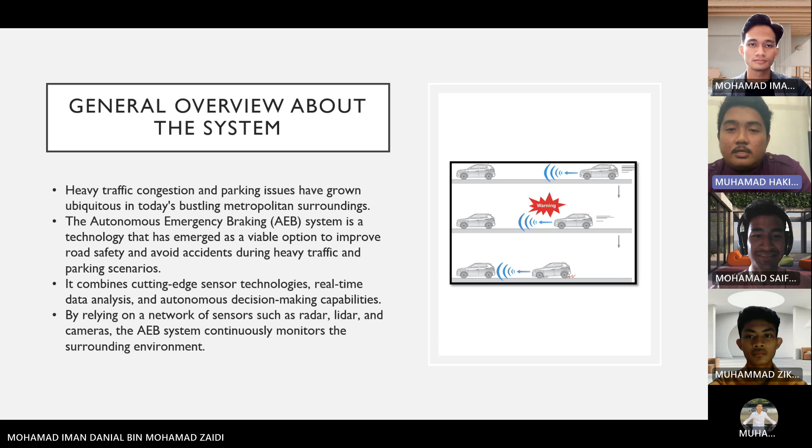The next topic is the objective. The objective of this report is to assess the performance, functionality, and limitations of the AEB system, while also considering its impact on reducing accidents and improving overall traffic flow in congested environments.

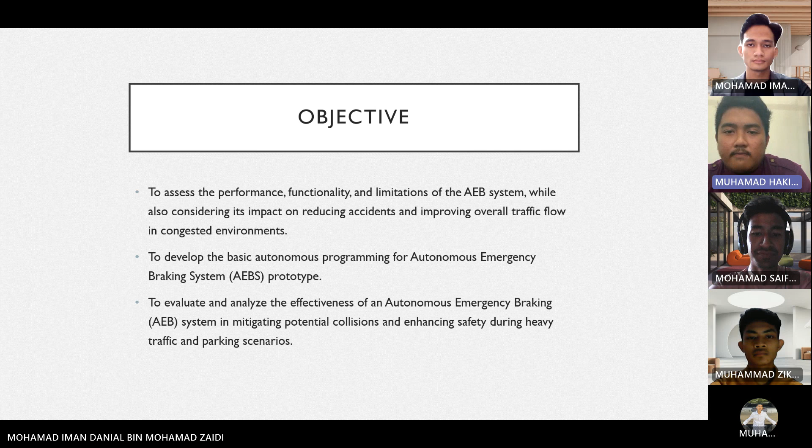To develop the basic autonomous programming for an autonomous emergency braking system prototype, to evaluate and analyze the effectiveness of the system in mitigating potential collisions and enhancing safety during heavy traffic and parking scenarios.

Next is the justification for why the system needs to be integrated with IoT. First is real-time data exchange: IoT connectivity allows the AEB system to communicate and exchange data with other vehicles, infrastructure, and smart devices in real time.

Second is advanced sensor fusion. IoT integration enables the AEB system to combine data from various sensors, both on board the vehicle and from external sources, such as traffic cameras or weather monitoring stations.

Enhanced early warning system: by leveraging IoT connectivity, the AEB system can receive early warnings and alerts from infrastructure and other vehicles.

Vehicle-to-vehicle communication: IoT integration allows vehicles equipped with AEB systems to communicate with each other. Lastly, cloud-based analysis and learning: IoT connectivity enables the AEB system to transmit data to cloud platforms for analysis and learning.

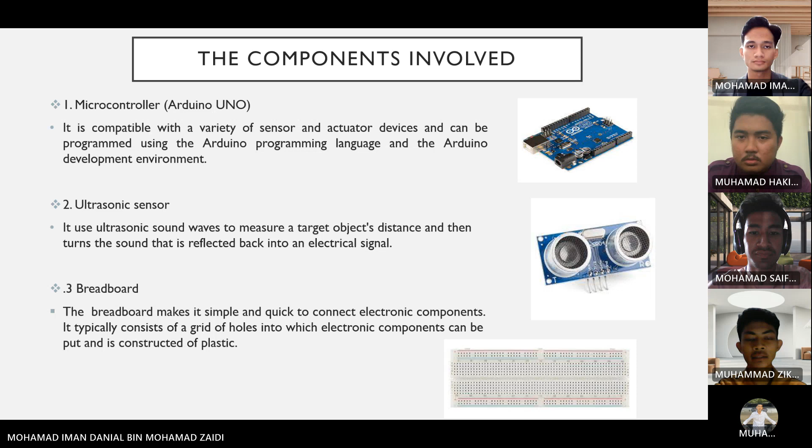Number four is the motor driver L298N. This module is capable of driving DC motors with peak currents of up to 2 amperes and a voltage range of 5 to 35 volts. It is a twin full bridge driver with high voltage and current that can drive inductive loads, including relays, solenoids, DC motors, and stepping motors.

Lastly, the buzzer. A buzzer is an electrical device that makes a buzzing sound when activated. They are commonly used as a signaling device, and some buzzers are also used as speakers for electronic devices such as smartphones or computers.

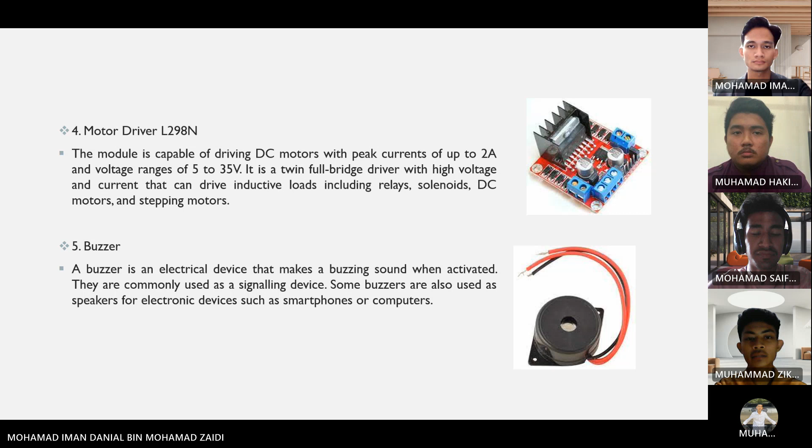Now we move to the software involved. Number one is Proteus, used to simulate electronic circuits and microcontroller systems. Before developing electrical circuit designs, it is used to design, test, and verify them.

The software offers a graphical user interface for creating and modeling circuits, in addition to a large selection of simulation models for various electrical components such as microcontrollers, sensors, and actuators.

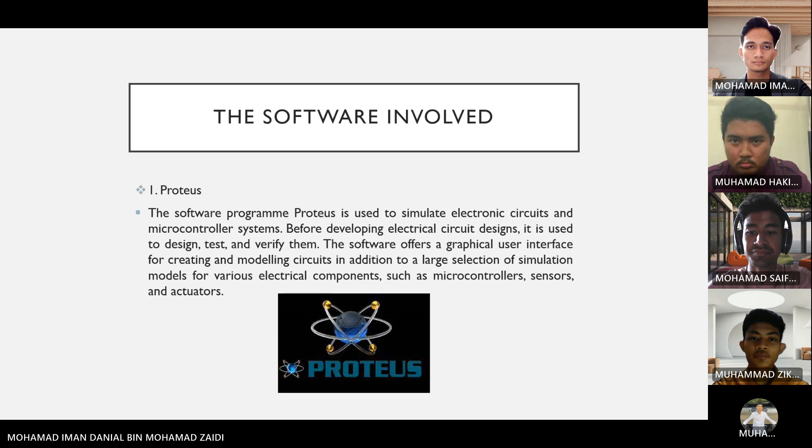Next, number two is Arduino IDE, a software application that allows users to write, upload, and run code on the Arduino board. It is a simple, easy-to-use program for writing, uploading, and debugging code, including a code editor, a library manager, a serial monitor, and a built-in programmer.

The code editor is used to write code in the Arduino programming language, based on C and C++. The library manager allows us to easily add and manage libraries of pre-written code that can be used to interact with different sensors, actuators, and other devices.

The serial monitor allows us to see the output of our code and send data to the Arduino.

Last for the software involved is MIT App Inventor, an intuitive visual programming environment that allows everyone to build fully functional apps for Android phones, iPhones, and Android or iOS tablets. Those new to MIT App Inventor can have a simple first app up and running in less than 30 minutes.

What is more, the blocks-based tool facilitates the creation of complex, high-impact apps in significantly less time than traditional programming environments. The MIT App Inventor project seeks to democratize software development by empowering all people, especially young people, to move from technology consumption to technology creation.

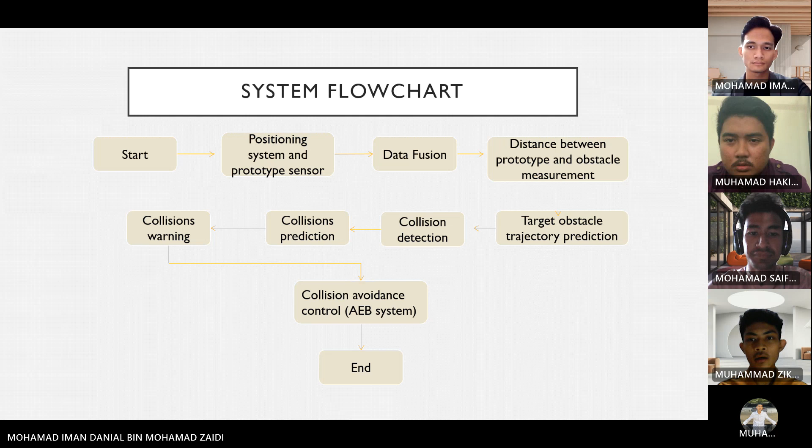So this is the process and activities offered by the proposed system. Collisions must occur, causing severe harm, serious injury, and even death. Accidents also usually happen while driving in the city because the car panics excessively to the point of experiencing emergency braking, so that sometimes we don't even realize it happening. To make life safer, we want to address the issue of repeated accidents by having an AEBS. Therefore, this project is important to ensure that the AEBS can function properly and achieve the desired purpose.

Alright, for the first activities offered, which is assist the owner. The autonomous emergency braking system (AEBS) works when an infrared sensor detects an obstacle in front of the vehicle. The infrared sensor will provide the information to the microcontroller. When this occurs, the data will be interpreted by the microcontroller, which will then determine the distance between the car and the barrier. The microcontroller will command the motor driver L298N

to operate. Next is automatically function, for the purpose of pulling the brake pedal attached to the brake system. When this happens, the brake caliper grips the brake disc and brings the vehicle to a complete stop. When the vehicle comes to a complete stop, this will come to an end. If the vehicle identifies an obstacle in front of it, this circumstance will reoccur.

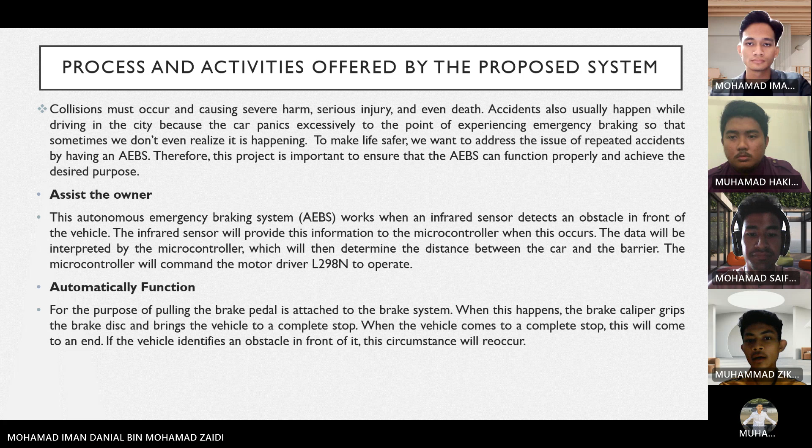So I will continue with the user interface design of the autonomous emergency braking system. Designing the user interface for an autonomous emergency braking system requires prioritizing simplicity, clarity, and ease of use. The design enables users to adjust the emergency braking distance when in parking or heavy traffic situations.

For the first function is a visual display - representation of the vehicle in parking or heavy traffic scenarios. Utilize a simplified overhead view or 3D rendering. Color coding or shading indicates distance from the vehicle to obstacles or vehicles. Lastly is an adjustable slider or numerical value display for emergency braking distance.

For the second one is adjustable distance control - a dedicated control element, slider, or up or down arrow for adjusting emergency braking distance. The control element is easily visible and accessible on the interface. A real-time preview demonstrates change in braking distance as the control is adjusted.

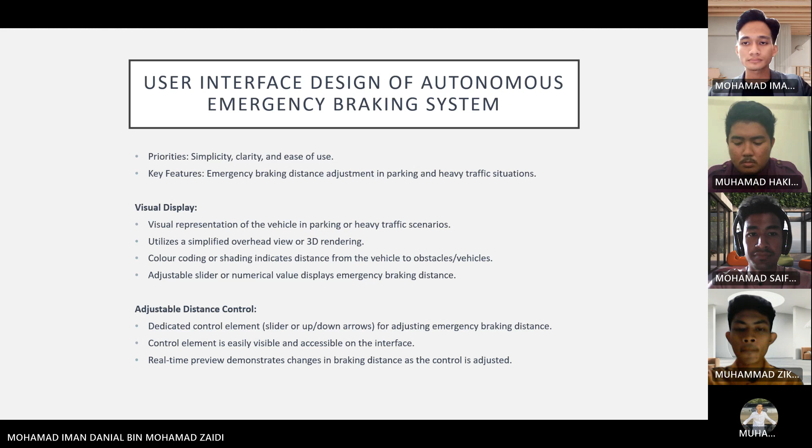For the third one is default and preset setting. A safe and appropriate default emergency braking distance is set for typical parking and heavy traffic scenarios. Preset options are offered for different driving conditions or user preferences, such as city parking, highway traffic, or custom setting. Users can save their preferred distance as a custom preset for future use.

For the fourth is feedback and notification. Clear visual and auditory feedback is provided when the emergency braking distance is adjusted. Notifications or warnings are displayed if the selected distance is potentially unsafe or exceeds recommended limits.

For number 5 is help and information. A help section or tooltip feature is included to provide users with information on how the emergency braking system works and the impact of adjusting the distance. Brief descriptions or icons are offered to clarify the purpose of different controls and settings.

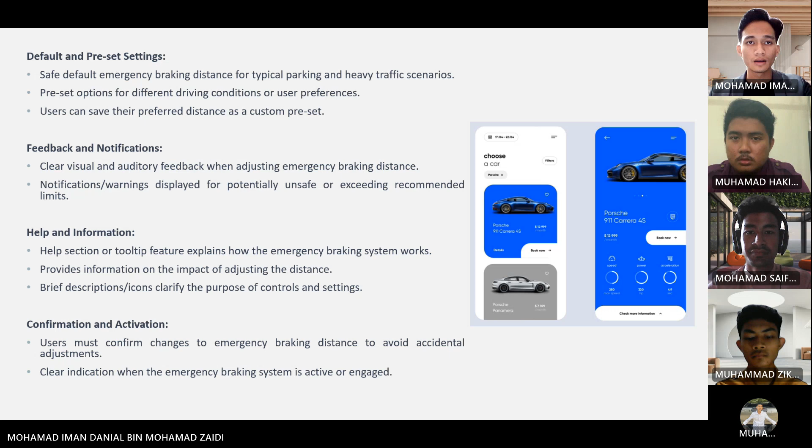Firstly, the AEB system includes an intuitive interface allowing users to adjust the emergency braking distance for parking or heavy traffic situations. Users can set a preferred distance that activates the emergency braking mechanism.

Ultrasonic sensors - the AEB system utilizes ultrasonic sensors to accurately detect obstacles and measure the distance. The sensors emit high-frequency sound waves that bounce off objects, enabling the system to calculate the distance between the vehicle and the obstacle.

Thirdly is signal processing. When the ultrasonic sensor detects the distance matching the user setting, whether it is in parking or heavy traffic, it sends a signal to the Arduino or ECU, which acts as the central processing unit. The Arduino or ECU interprets the signal and executes the necessary action.

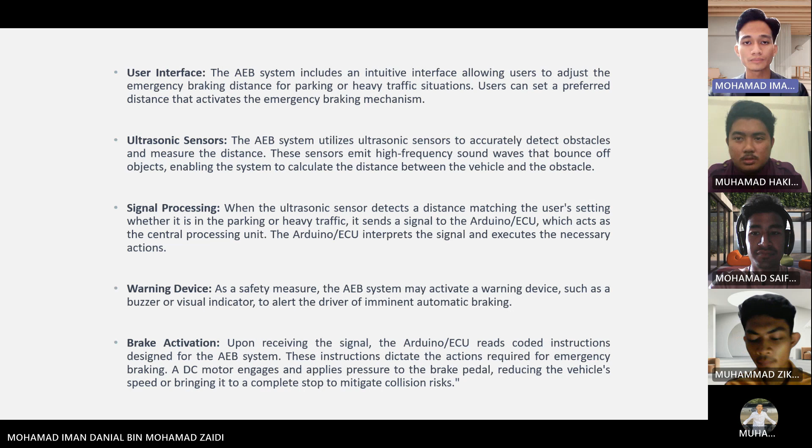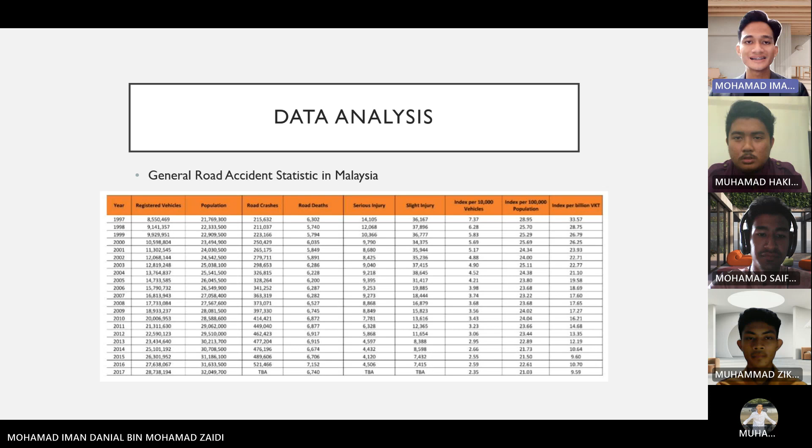We move to the data analysis: the general road accident statistics in Malaysia. The descriptive analysis of the table shows that the analysis of general road accident statistics in Malaysia reveals a consistent decline in the number of accidents over the years. This positive trend reflects the effectiveness of road safety measures, awareness campaigns, and improvements in infrastructure and regulation.

Predictive analysis: based on the historical data showing a decreasing trend in accidents, it is reasonable to predict that the number of accidents will continue to decrease in upcoming years. However, accurate prediction requires considering factors such as new road safety initiatives, traffic patterns, and driver behavior. And lastly is prescriptive analysis.

To further reduce accidents in Malaysia, implementing advanced technologies like the IoT-based autonomous emergency braking system is crucial. The system utilizes ultrasonic sensors, cameras, buzzers, and an Arduino or ECU to detect potential collisions and automatically apply the brake to prevent accidents. By mitigating human error, which is a major cause of crashes, the AEB system significantly contributes to accident prevention and reduction. That's all from my part. Saiful will continue for the next part.

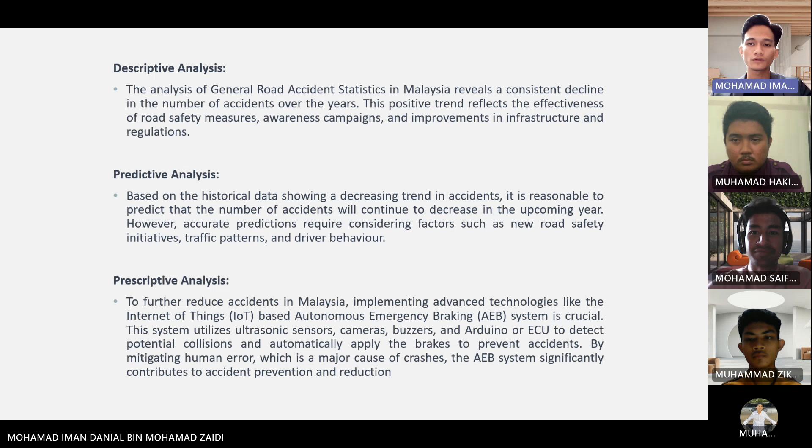We start with the advantages of the system to UniKL MFI. The first one is it can help to prevent or reduce the severity of collisions on the campus. AEB can help to prevent or reduce the severity of collisions involving university vehicles, such as cars, motorcycles, buses, and shuttles. This can help protect students, faculty, and staff from injury or death.

The second one is it can reduce the number of accidents involving pedestrians and cyclists on the campus. AEB can help reduce the number of accidents involving pedestrians and cyclists on the campus. This is especially important in areas where there is a lot of foot traffic, such as near the library, classrooms, and dining halls. The third one is it can help reduce the number of accidents involving distracted drivers on campus.

AEB can help reduce the number of accidents involving distracted drivers on campus. This is because AEB can automatically apply the brakes if the driver does not react in time to a potential collision. The last one is it can help improve the safety of university transportation services. AEB can help improve the safety of university transportation services, such as buses going to the desired place. This is because AEB can help prevent or reduce the severity of collisions involving these vehicles.

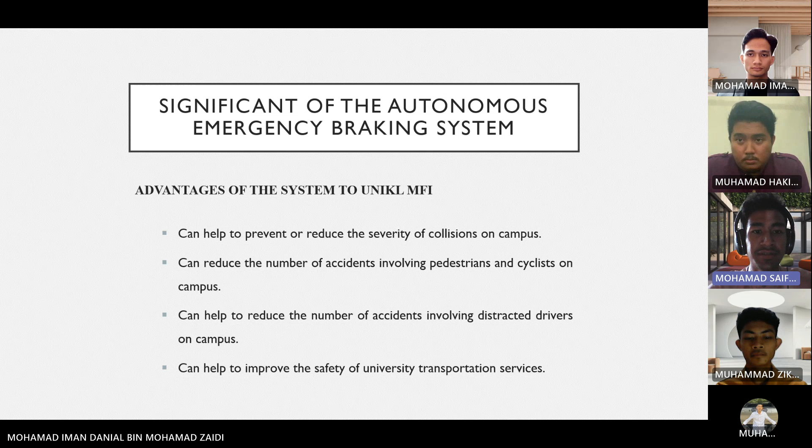Okay, next, we move to the business opportunity in the market. The business opportunity in the market for autonomous emergency braking systems is significant. There are several factors driving the growth of the AEB market.

These include, number one, rising number of road accidents. The number of road accidents is increasing every year, and AEB can help reduce the number of fatalities and injuries. The second one is stringent government regulation.

Governments around the world are increasingly mandating AEB systems on new cars. For example, the European Union has mandated that all new cars sold in Europe must be equipped with AEB by 2022. The last one is increasing demand for safety features. Drivers are increasingly demanding safety features in their cars, and AEB is one of the most popular features.

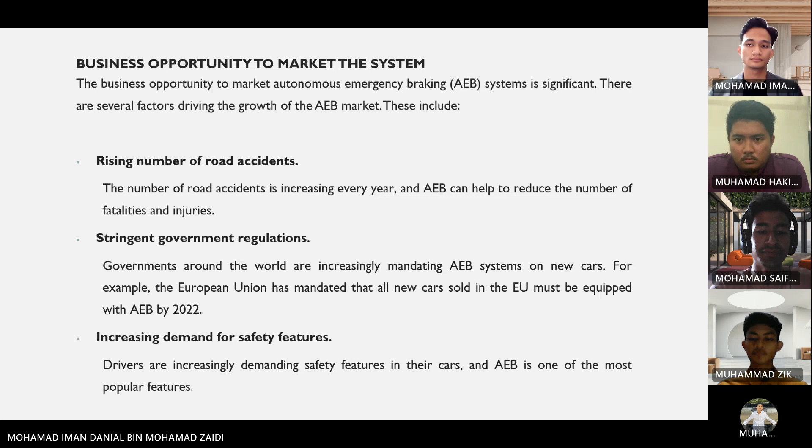Right, next: target users and customers. There are several ways to market the AEB system. One way is to target OEMs, original equipment manufacturers. OEMs are the companies that make cars, and they are the ones who ultimately decide which safety features to include in their cars. Another way to market the AEB system is to target fleet managers. Fleet managers are responsible for the safety of their drivers and vehicles, and they are often willing to pay for safety features that can help prevent accidents.